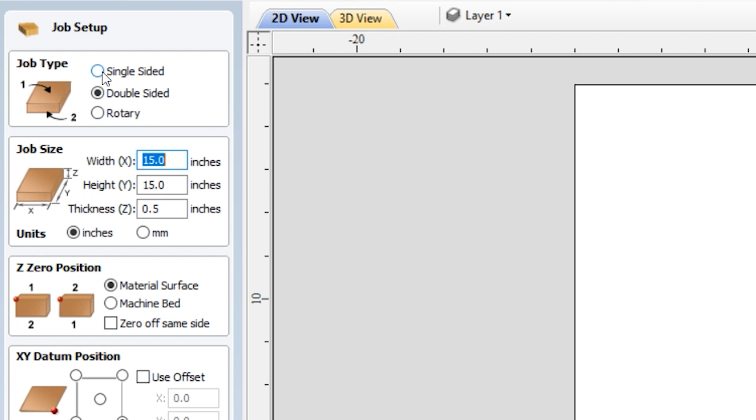For the purpose of this tutorial, it will be a single-sided job, so we need to select single-sided. The units we will be operating are millimeters, so we select millimeters. And now we can define the job size, which will be 600 millimeters along the x-axis and 400 millimeters along the y-axis. And the thickness of our material is 12 millimeters.

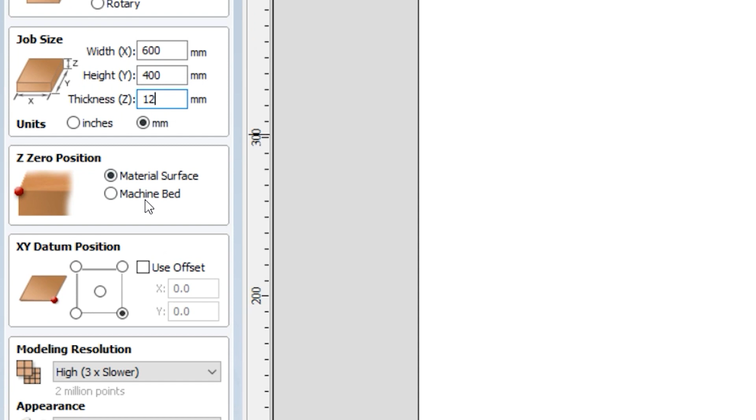We will be defining our Z0 position at the machine's bed. And the bottom left corner of this rectangle will be our X and Y datum position. So the point here will be the closest point to the console on the SmartBench. Now we can define the modeling resolution, which we use as standard for faster performance. And here we will select, for example, Birch. So now when all the settings are updated, we can click on OK.

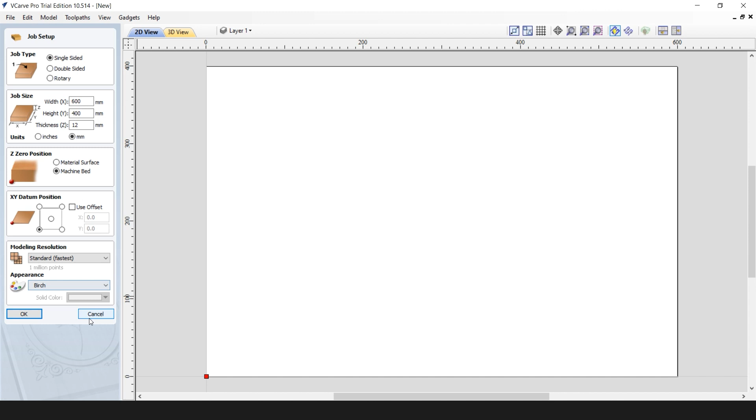And now this is a good moment to save our file. Please find the location for your file where you want to save your job. I will create an additional folder here, and I call it First Routing Project. And now I'll save my file as my first project.

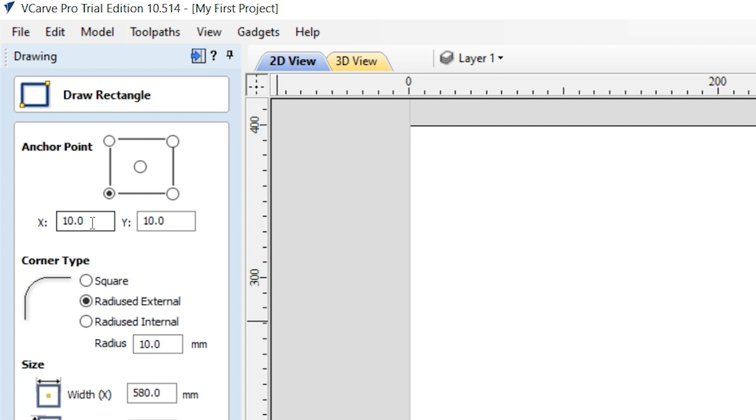So now we set up our job and we can draw the features we will use in our routing job. We will start from the rectangle, which will define the contour of our sign. And we will do a parametric setup of the rectangle. We will set up anchor points with X and Y equal to 10. And we will do curved corners with the radius of 10 millimeters.

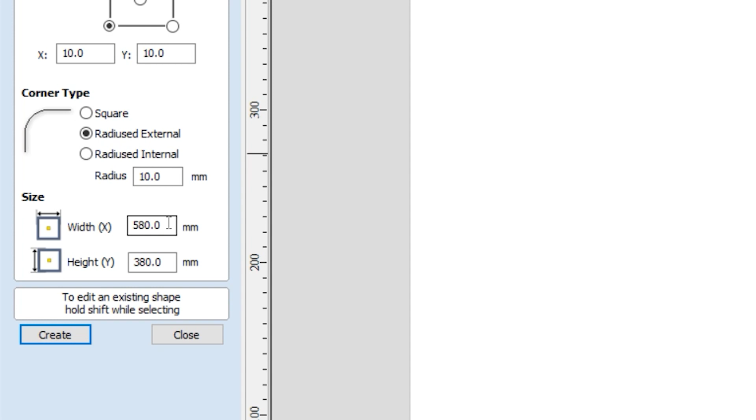And because our sign is 600 by 400, we will just make sure it is within the boundary, and the offset from the edges is 10 millimeters. So now we can create this rectangle. As you can see, it has appeared here with the equal distances from the edges. We now can close this window.

So the next feature will be our mounting holes. So we'll go and draw the circle. And the diameter of the circle will be 7 millimeters. And we again use parametric values to position our holes at the particular locations. So this is our bottom left. So we will keep X at 30 millimeters.

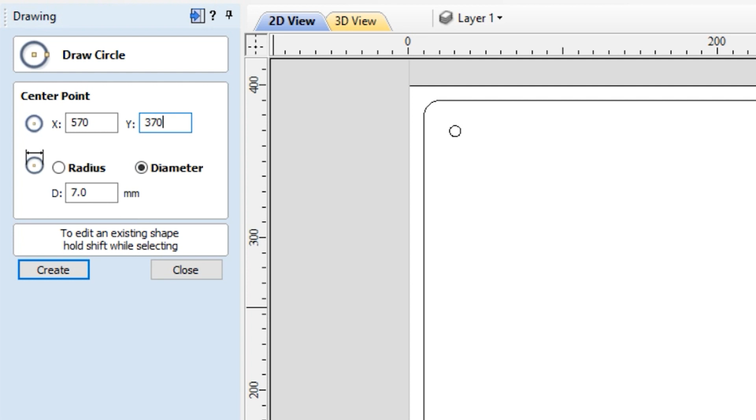And we'll go and create another hole in the top left corner. Now we need to adjust the X to be 570. Create our bottom right corner and our top right corner. Now close.

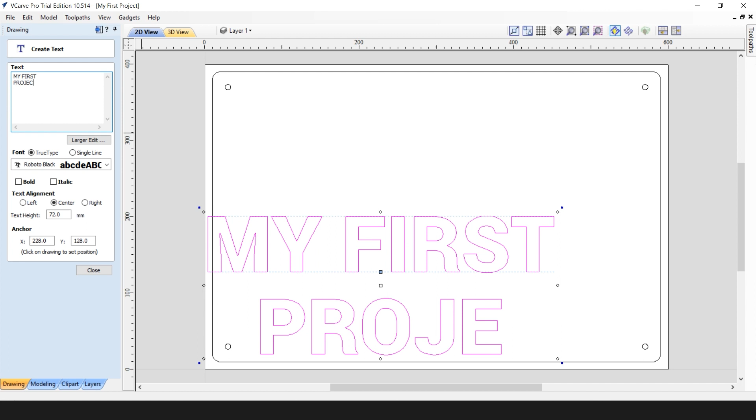And the last feature we need to create is our text, which will be written on the sign. We will write my first project. We will make sure that the text is aligned in the center, and the text height is 72 millimeters. Don't worry about the position of the text. There is a special feature in Vectric allowing you to position the text in the middle of your job.

And to do that, you need to make sure the text is selected, so its appearance changes to magenta, and you can go to Edit, Align, Selected Object, and you can specify it needs to be positioned in the center of your material. Don't forget to save your file. And now your job is ready to produce the cutting toolpaths.

To generate a cutting toolpath, CAD/CAM software will use the drawn features and the tool settings saved in the tool database. So the first thing to do is to check whether we have all the tools required to do the job in our tool database. You can go to Toolpaths, Tool Database. In this particular job, we will be using two types of tools. We will be using an engraving tool, and we'll be using a flat-end mill.

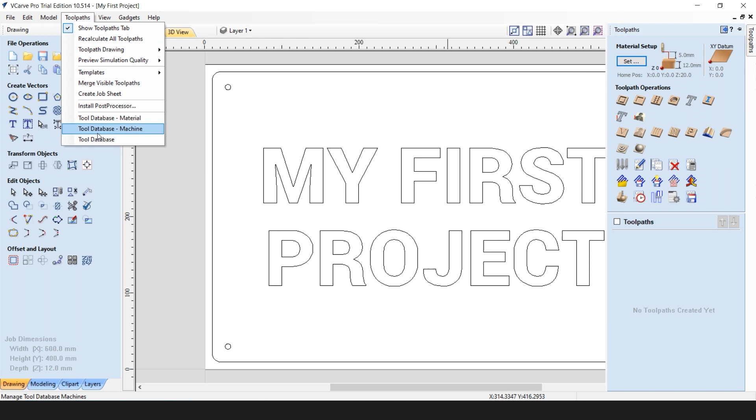By checking in the engraving section, we can see that the tool we will be using is missing, so we will need to set it up. There are two ways to set the particular tool. You can do it from a particular toolpath generating, or you can go to Toolpaths and Tool Database and add the tool in this list.

So Vectric database arranges the tools by material, and you can also create several tabs just for better sorting and better visibility. We're using soft plywood, so we will set up a tool by selecting softwood from the menu. We will go into engraving tools, and we click on this plus sign to add a tool.

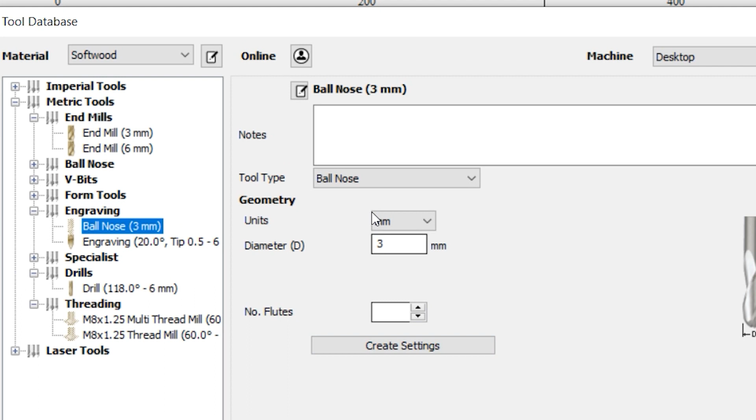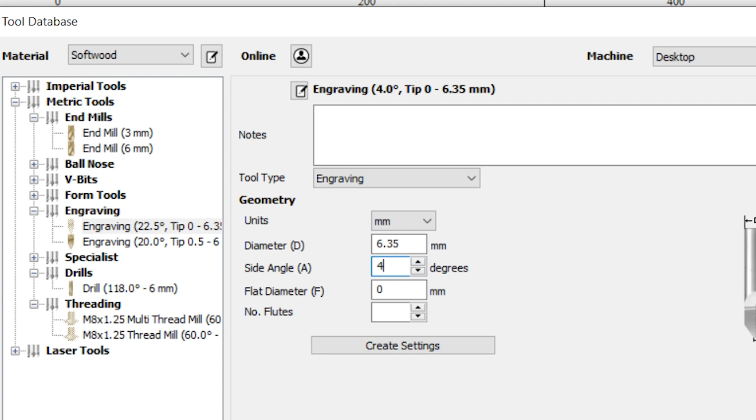The tool type will be engraving. The units used millimeters. The shank diameter is 6.35 millimeters, but we will be using a 90 degrees engraving tool. But beware that the side angle is just a half of the angle, so therefore we will put 45 degrees in here. And number of flutes for our particular tool is 2.

So now we can create settings for our tool by clicking on Create Settings. We will set up pass depth as 2 millimeters. Step overs are not relevant because we will be doing a contour engraving, so we can just ignore these settings here for now. Spindle speed we will leave at 20,000 RPM. Feed units will be millimeters per minute. Our feed rate will be 3,000 millimeters a minute, and the plunge rate 750 millimeters a minute.

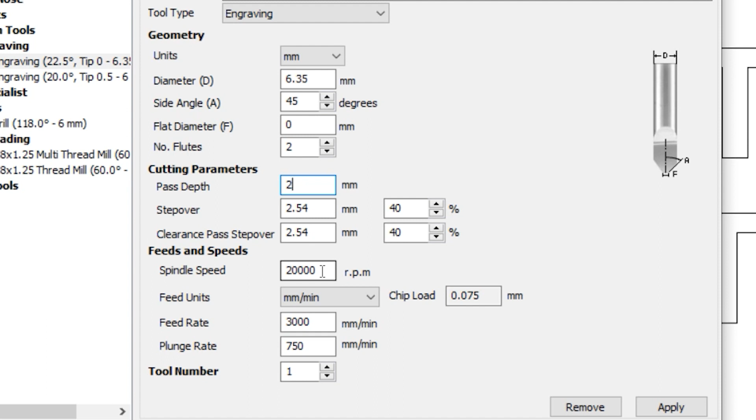It's worth keeping in mind that the selected parameters are just the nominal values, and these will depend on the type of tool you're using and the type of material you're using. So you can refer to our knowledge base article on feeds and speeds. So we can click OK, and it will save the tool in our database. So now we can check the tool is now present here.

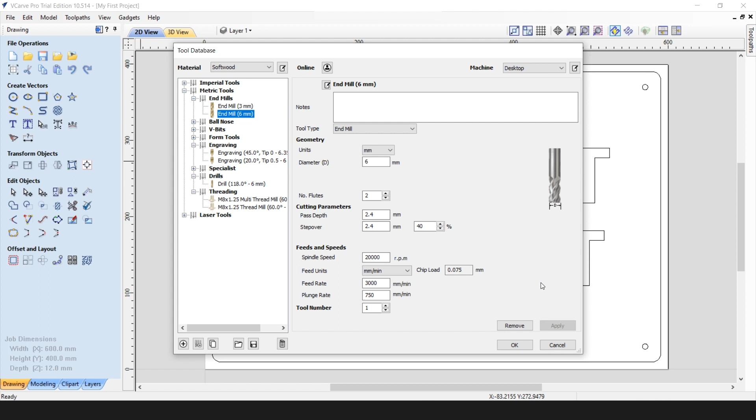And the second tool we're using is just a 6mm end mill, which is already set up in the database. If you don't have the tool in the database, you can set it up the same way as we set up the engraving tool. Now all our features are drawn and tools specified in our tool database. We can start generating cutting toolpath by assigning a tool to particular features.

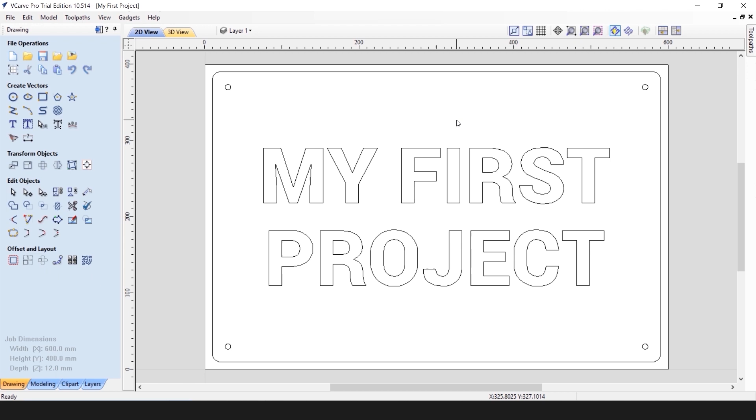We will start from engraving the text. So you need to select the text. Its color will change to magenta, showing you that it is selected. Click on the Toolpaths tab. You can pin it so it doesn't hide itself. And we can go into Quick Engraving Toolpath.

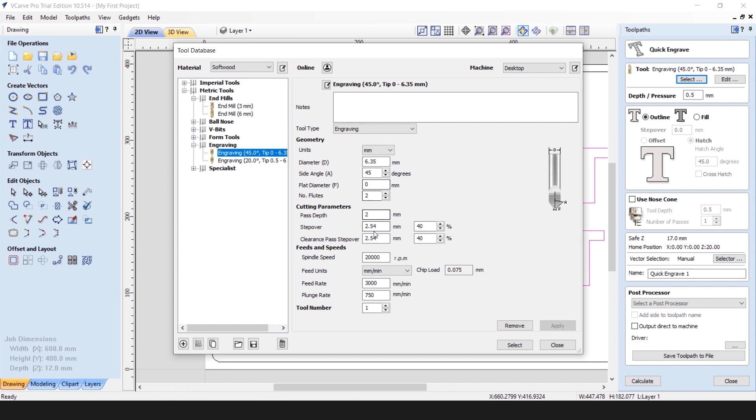We need to select the correct tool, which is Engraving 45 degrees side angle tool. And check the parameters for spindle speed and feed rates and plunge rates, which appear to be correct for our particular job. And click on Select. Our engraving will be 0.5mm deep. We will do just outline of the text.

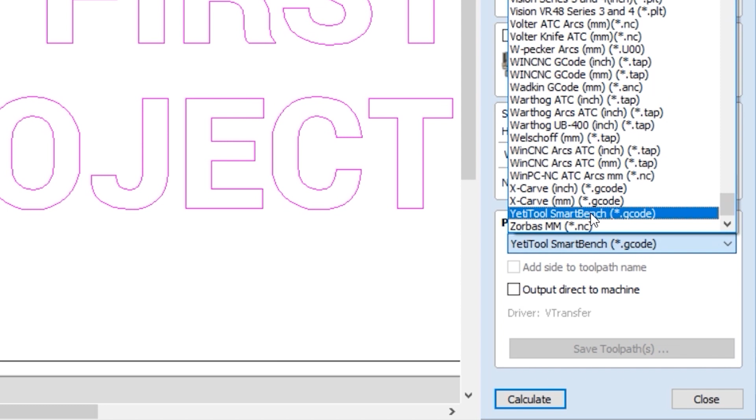And the only thing left is to choose the post-processor. And Yeti Tool SmartBench post-processor exists in Vectric database. So we need to choose it. And once all parameters are set, we need to click on Calculate. Our quick engraving toolpath appears in the list, and our 3D view tab shows you the preview of the toolpath. Now we can continue generating toolpaths. We can close this preview toolpath window.

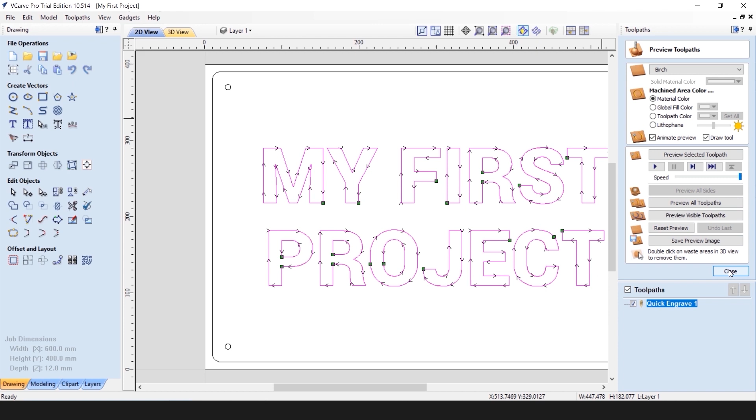The next step we will do is our mounting holes. Start by selecting the first hole, hold Shift button on the keyboard, and left click on all circular features here. The color will change to magenta. That means they're all selected. We will use the Pocket Toolpath Generation tool.

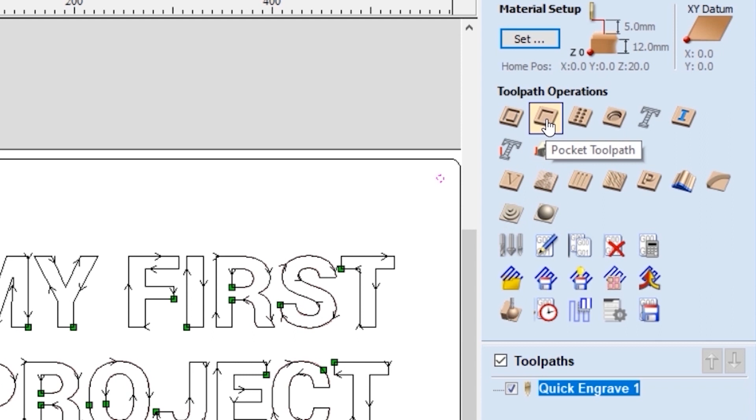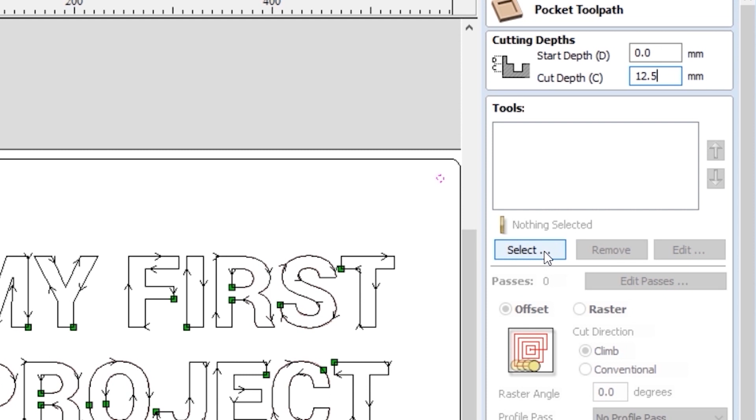Because we need to cut through the whole depth of the material, and our material is 12 millimeters thick, we will need to go a little bit deeper than 12 millimeters. So therefore, our start depth will be 0 millimeters. Our cut depth will be 12.5 millimeters, which is half a millimeter deeper than the bottom surface. We now need to select the correct tool, which will be end mill 6 millimeters. And again, check our feeds and speeds for the particular selected tool, which appear to be okay for our job,

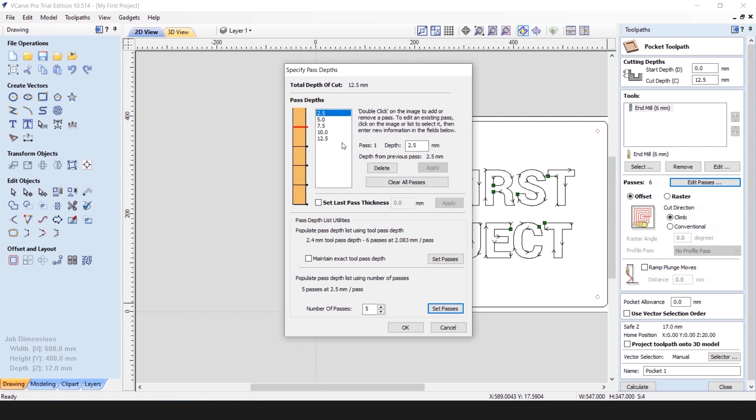and click on select. Now we need to edit the number of passes, which defines how deep the cutter goes into the material on every pass. Vectric normally defines it automatically, but you can override it with the desired number of passes. In this particular case, we will choose 5 passes, which will make each pass 2.5 millimeters deep. Don't forget to click on Set Passes so it will change in the list, and click on OK.

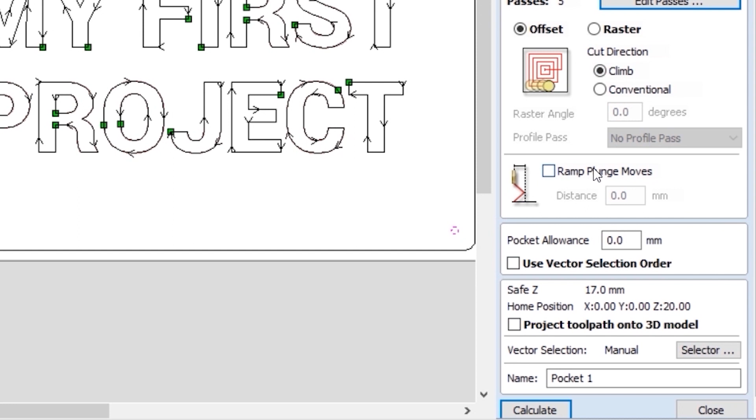Because we're cutting 7 millimeter diameter holes with the 6 millimeter tool, we can use an offset cutting rather than raster cutting. And we can choose the cut direction as climb. Once all parameters are set up, we can click on Calculate. There will be a warning saying that we are cutting through the depth of the material, which is correct. So we can confirm that. And once again, our toolpath will appear in the list, and its preview will appear in 3D View tab.

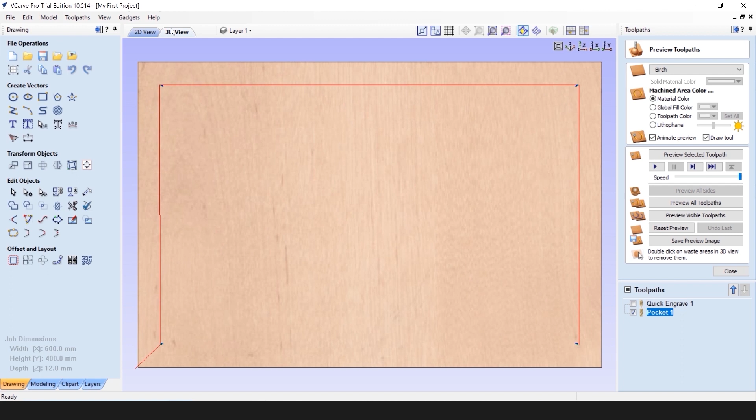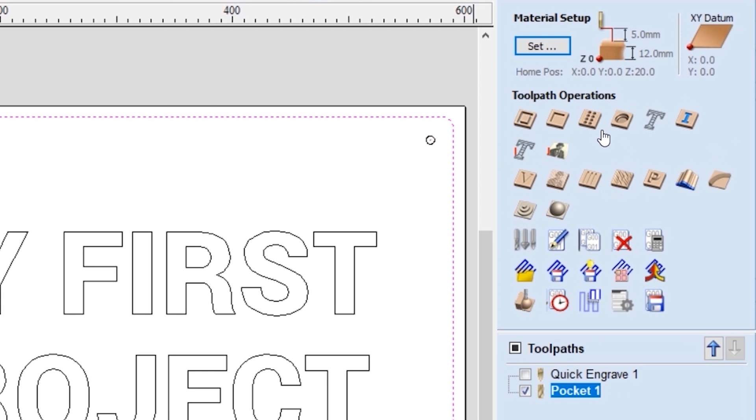Now, last but not least, we need to specify the tool and the method of cutting our contour for the sign. Close our preview toolpath window. Click on our contour toolpath and choose the profile toolpath from the list.

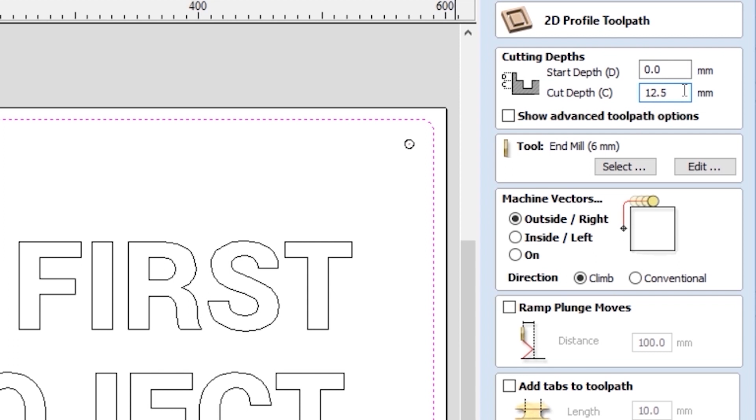Once again, we will be cutting through the whole depth of the material. So that means we need to go a little bit deeper than that. So our starting depth will be 0, and our cut depth will be half a millimeter deeper than the thickness of the material. We need to select the correct tool, which is our 6 millimeter end mill.

Click on Select. We will be cutting on the outside of our contour, so our sign will be the size of our contour. And because once the tool cuts through the depth of the material, the sign will detach itself from the stock material, this is what we don't want to happen, so we need to add tabs.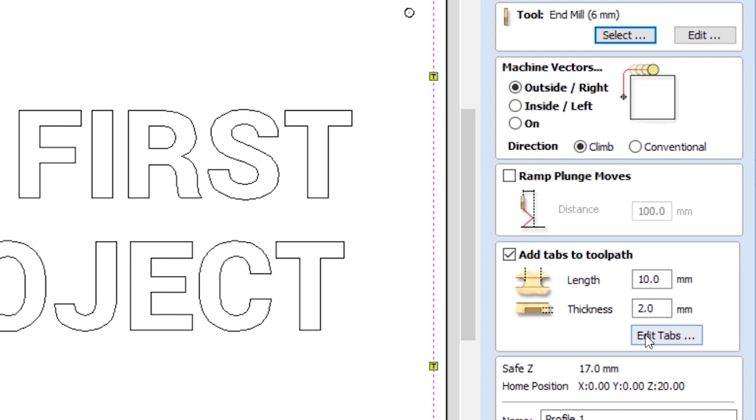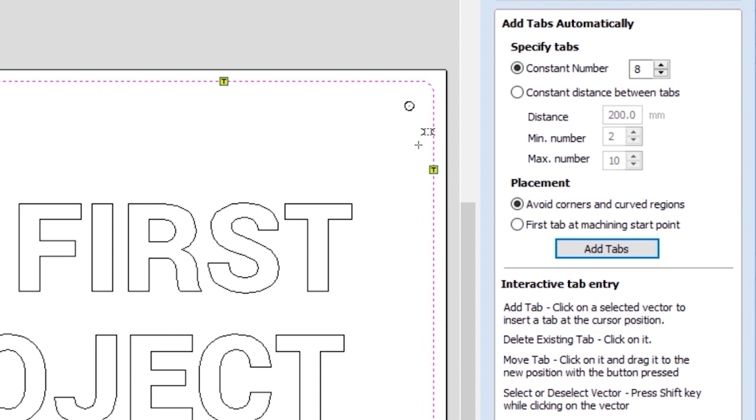If the locations for the tabs are not satisfactory, you can always go and edit the tabs. You can delete the tabs shown, and you can say how many tabs you want to add. Let's assume that we want 2 tabs on each side of the rectangle, so we'll put number 8, and Vectric will automatically assign them to the best of its knowledge, taking the placement parameters into account, and it will display the preview of the tabs. If everything is good, you can close.

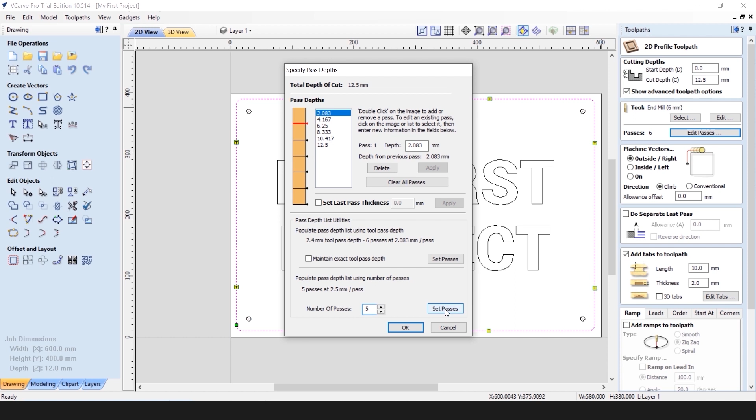If you want to define the depth of each pass, you can click on Show Advanced Toolpath Options, and you can edit the number of passes here. We will apply the same logic as we did with mounting holes, so we will do 5 passes at 2.5 millimeter depth each. We can set the passes now, and we can click OK. After all the parameters are set up, we can click on Calculate.

Once again, the warning will come up about cutting through the whole thickness of the material. This is OK for us. We can confirm our choice.

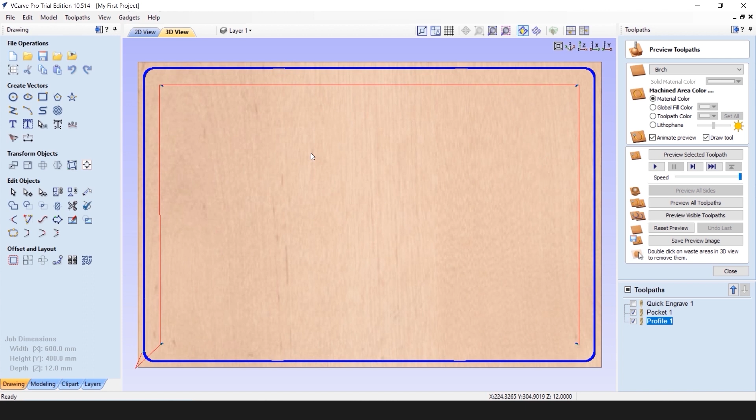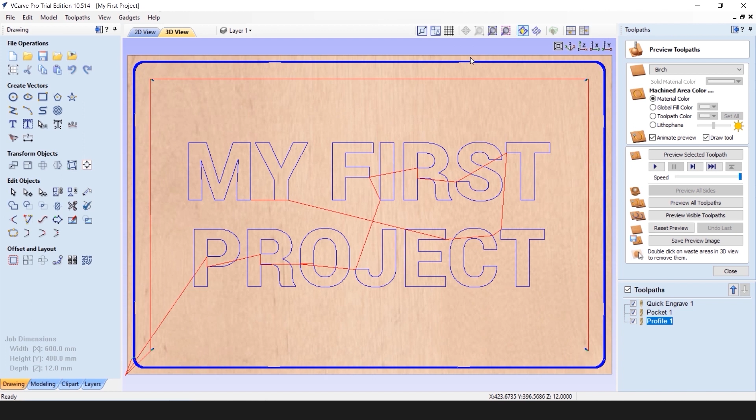Now, if you want to see the preview of all the toolpaths, you can click on Toolpaths in the list, and it will display all the toolpaths set up for this particular job, like engraving, our mounting holes, and the contour of the sign. You can also see the tabs produced, they are displayed here. So the list of our toolpaths is arranged in the order we set it up. The first operation will be engraving, then pocketing, and then profiling.

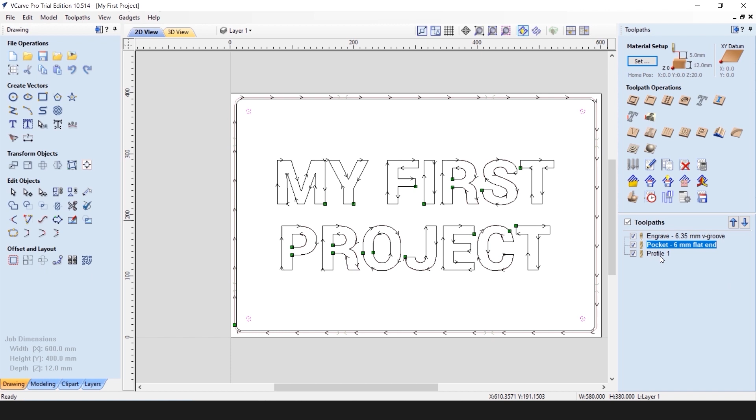Unfortunately, the list is not informative about, for example, the tools we're using. So if you want to rename the toolpaths, you can right-click on its name, click on Rename, and now you can rename it to contain information you want. We'll be using a 6.35mm V-groove cutter. For the pocket, we'll be using a 6mm flat end. And for the profile, we'll also be using a 6mm flat end cutter.

You can also change the position of the operations by moving them up or down. This will only become relevant when you want to export multiple toolpaths in a single file, so the definition of the list becomes very important.

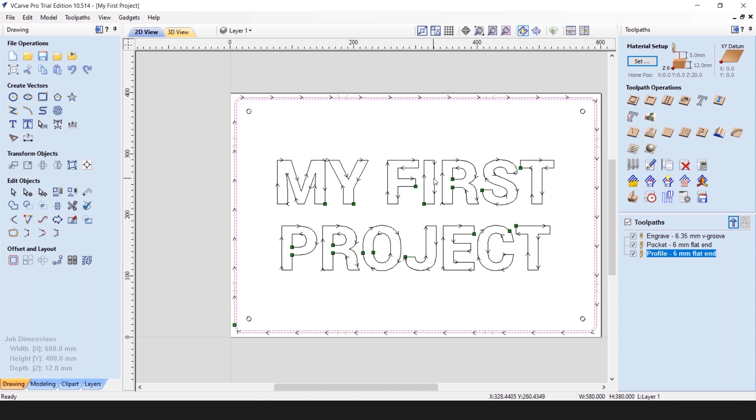Now our toolpaths are generated. We are ready to export them into G-code files.

We now want to export all the toolpaths we created into a job file for tool changes. In our list, we can see that we use two different tools, an engraving cutter and a flat end cutter, and the last two operations use the same type of tool. That means we can create two job files, one for engraving and one for operations which use the 6mm flat end cutter. If you want to save all toolpaths into multiple files, you need to make sure your toolpaths are selected by clicking on Toolpaths.

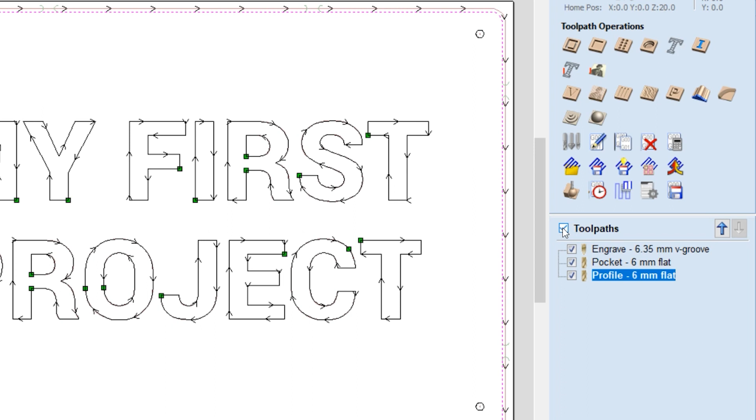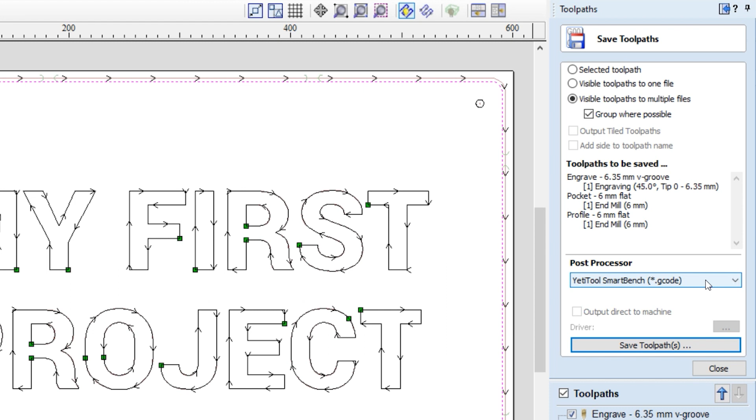You can click on the Save Toolpath button. In the following list, you need to select Visible Toolpath to multiple files and group where possible. You will see the list of all toolpaths being exported. You need to select YetiTool SmartBench as a post-processor, and you need to click on Save Toolpaths.

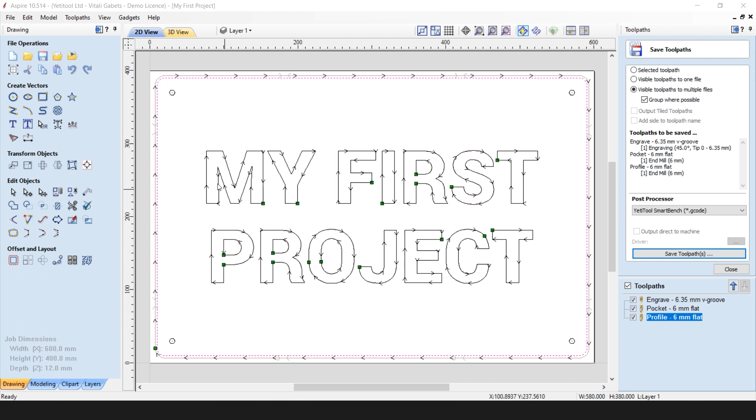The name specified here will be the prefix for all files created during the export. So we will create 'first routing project,' and we click Save. Once export is done, you can check what files were created. As you can see here, we have two job files created. Operation number 1 will use the 6.35mm V-groove engraving cutter, and operations 2 and 3 will use the 6mm flat end cutter.

Now these files can be transferred to your SmartBench. There are two ways in which you can do this: you can use a USB stick, or you can transfer via Wi-Fi using FileZilla or our Yeti Tool SmartTransfer app. For tutorials on both these methods, please watch the videos linked in the description.

For this project, I will be using the SmartTransfer app. It will scan for the SmartBenches available. We will choose the machine we will be using, and simply select the job files and drop them onto this window. The status of transfer is success, so now we carry on with the actual operations on the machine.

This video is for beginners. All numbers used are conservative. As you become more experienced, you will be able to increase parameters such as feed speeds and cut depths.